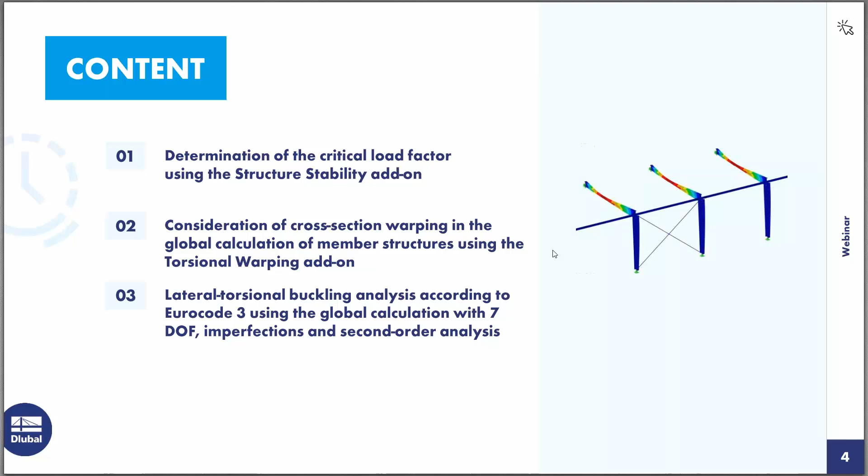The first thing we want to look at is the structure stability add-on. Here's a short overview of the features of this add-on. We can use the structure stability add-on to determine critical load factors for our structures and also calculate models consisting of member, shell, and solid elements.

In this webinar, I'm going to present members in the structure stability add-on because we also want to show the combination with the 7 degrees of freedom calculation. I think shell elements and solid elements will also be part of another webinar in the future.

Another feature of the structure stability add-on is the nonlinear stability analysis. We are using incremental loading to also calculate nonlinear systems in the structure stability add-on. There's also an option which will help us determine the mode shape of an unstable model so that we can find the cause of the instability. We will also look at this in the webinar today.

We can also have a graphical representation of the stability mode shape and use it as a basis for the determination of imperfections. In the first example, I want to use a simple example in RFEM to show you the basics of the input for the structure stability add-on and also which results we will get from the calculation with the structure stability add-on.

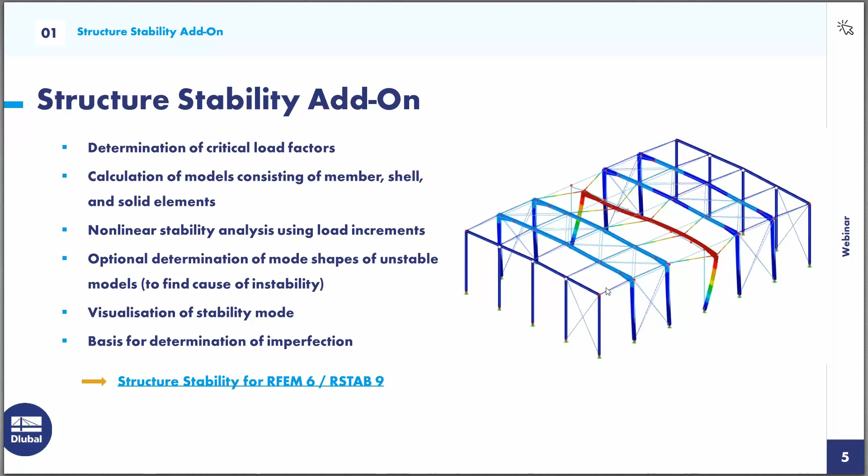So I will switch to RFEM and we will look at the first example. It's a very simple example in this case: a simple steel frame. We have rigid frame edges and simple supports. Now we have one loading condition: vertical loading and a horizontal load.

We want to look at all the settings necessary to perform a stability analysis with the structure stability add-on for this example. First, if you want to use the structure stability add-on, we need to activate it in the base data dialog. So I go into the Edit Model Base Data dialog, and then we have this tab for add-ons where we can activate the structure stability add-on.

You have probably noticed that in the main tab of the base data, we have chosen the model type 2D. So if we have chosen only this 2D model type, the structure stability analysis will also be performed in this 2D plane stress environment. We will see in the first step only mode shapes for this 2D structure.

Now I have activated this add-on, and we will see that in the navigator for the data we have an additional stability analysis setting. Without the stability add-on, we don't have this setting, but now it's here with already two predefined stability analysis settings.

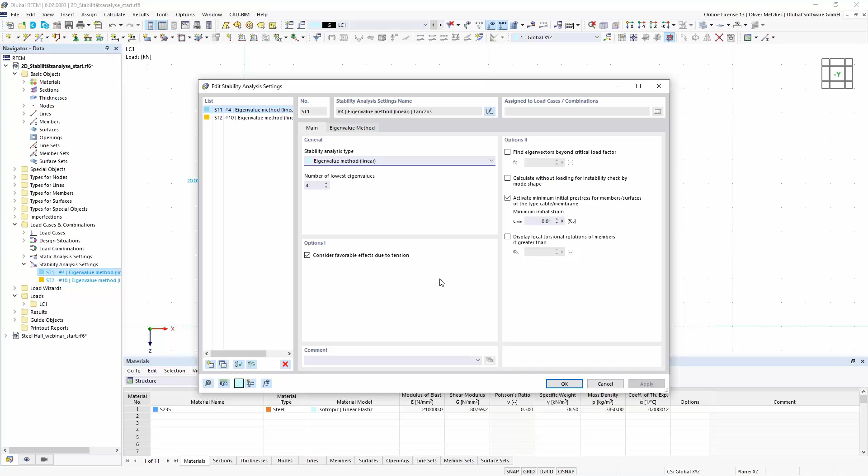If we open the first one by double-clicking on it, we see that in this stability analysis settings, we can set all the options that we want to consider for our stability analysis. So we have as an important choice the stability analysis type. We have this linear eigenvalue method for determination of the critical load factor, and also an incremental method for calculating nonlinear systems. In my example, I only want to use this standard eigenvalue method for the linear system.

When we have our stability analysis setting, we can also assign it to our load case to start the structure stability analysis. I can edit my load case number 1 by clicking the Edit Load Case button, and then we see that if we have this stability add-on activated, we have an additional option: Calculate Critical Load Structure Stability Add-on. If we activate it, we can choose in the drop-down list our corresponding stability analysis setting that will be applied.

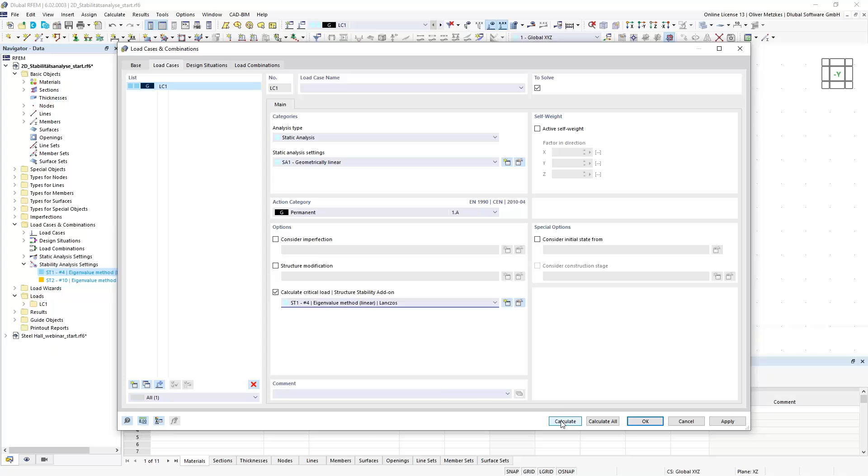If I calculate now my load case number 1, then we will see in the calculation diagram that first the static analysis is performed for load case number 1, and that is used as a basis for the stability analysis. When we have calculated our load case number 1, we will get the internal forces and support reactions for the static analysis, and we can also switch to the results of the stability analysis.

In the navigator for the results, we have this drop-down list where we can switch between static analysis and stability analysis now. If we switch to the stability analysis, we will see the graphical representation of the mode shape, and by default for the members it's represented by line display.

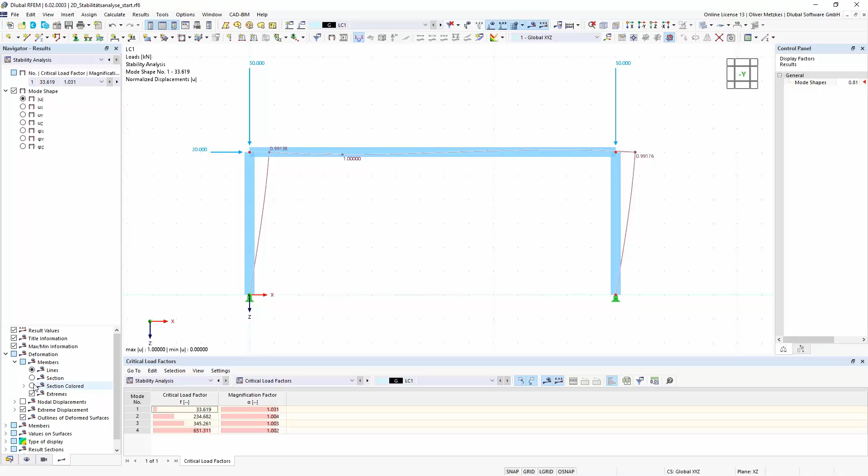We can also choose the display mode. Here in the navigator for the results we have options at the bottom, so if I choose to display my deformations for the members by colored sections, then I will also get this colored representation with the sections. That is mostly easier for the imagination of the mode shape.

I also get the results in the tables. So in the result tables for stability analysis, I will now see my critical load factor corresponding to the first mode shape. For this example, the first critical load factor is 33.6. That means that if I multiply the load of my load case number 1 with 33.6, I will have the stability failure with this mode shape of my simple frame.

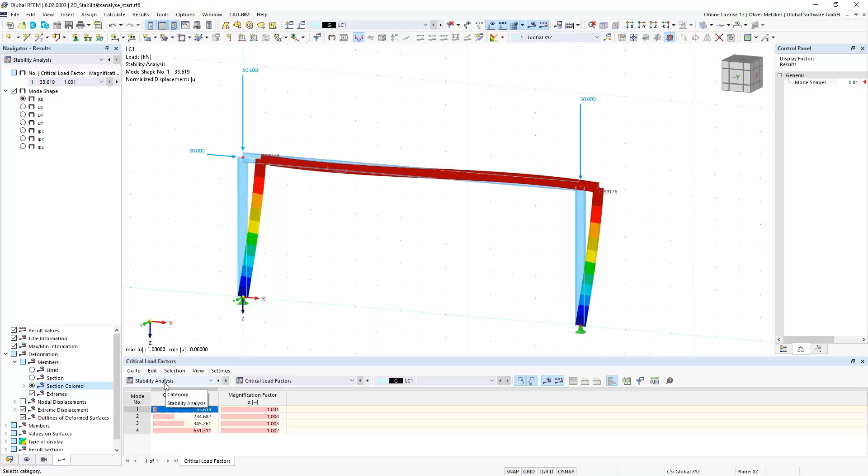So that is the result that I get, and I also get further mode shapes according to the setting that I have set in the stability analysis settings.

Now, I have said that this is only a 2D structure. So the first mode shape is this in-plane flexural buckling of the frame, and I don't get any out-of-plane buckling shapes. If I also want to consider the out-of-plane buckling, then I can go into my base data dialog and change the model type to 3D.

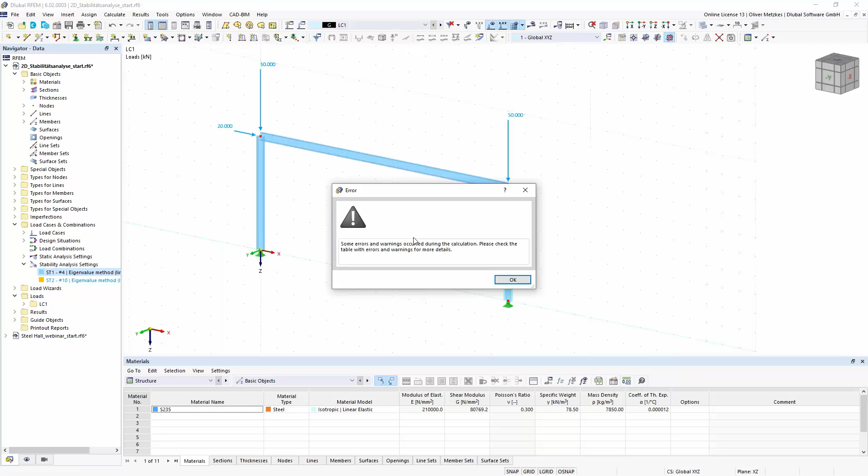I will do so. Okay. And then I can also just try to calculate it again. And then I will see that I have not changed anything with my support conditions, so the result of the calculation in this 3D model environment now will be that there's an error because the structure is unstable.

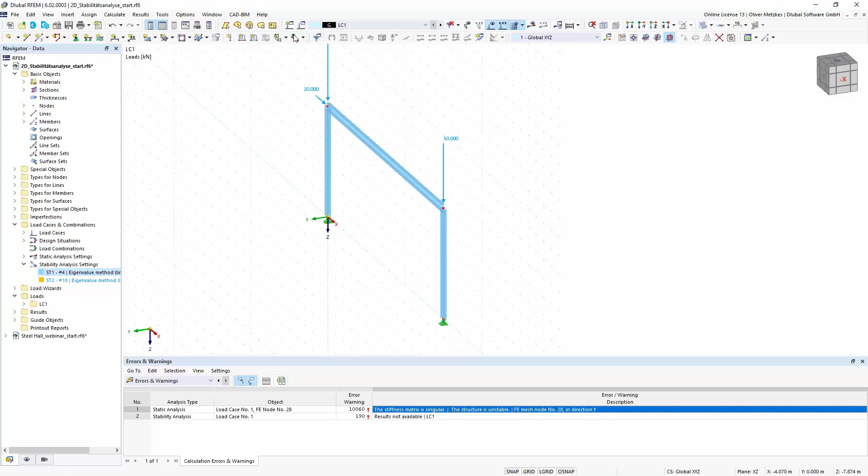For my easy structure, it is very easy to determine the cause because I have not changed my supports. I have the simple supports here, but I don't have any support in the out-of-plane direction. So for this case, it would be easy to say there are supports missing. But also if you have more complex models and get this error for instability, the structure stability add-on can be helpful.

So as I have said in the overview, there's another option. If we go into the stability analysis settings, we have this option for the calculation without loading, for instability check by mode shape. We can use this method if we think there may be an instability due to modeling issues, if maybe you have forgotten a support, or also if you have nonlinearities. This helps check if it's maybe a modeling problem that your structure is not stable, like it is in this case. As a result, you will get the mode shape of the unstable structure, and then you can easily see what the problem is.

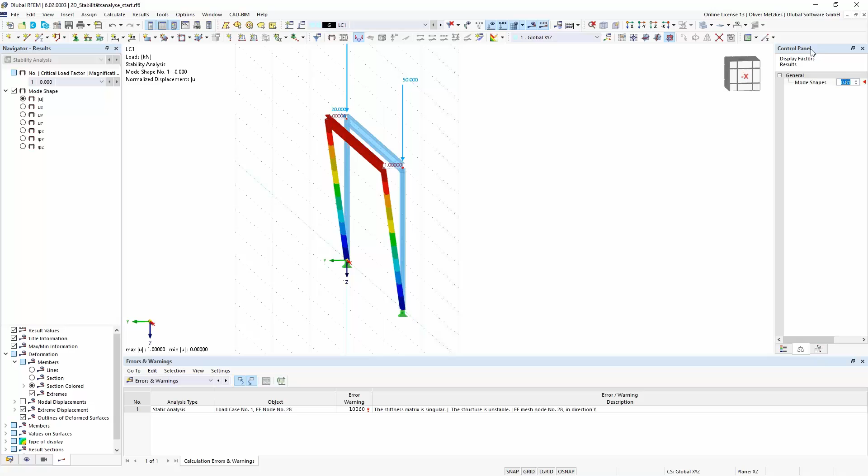So in my case, I don't have any support in the out-of-plane direction, so I will see that the frame will have a high deformation, and there won't be any restraint, and it will not be a stable structure that can be calculated.

This option is in the structure stability add-on that can help you in case of modeling issues with instability. In my case, it would be easy, so I just wanted to place some supports here. I'll have the supports in Y direction in the frame edges. So I select the Y direction here and assign it to my frame edges.

Okay, perfect. Now I can change the setting back so that I calculate my mode shapes with loading to get the corresponding buckling shapes. I will calculate it again, load case number 1, now also in the 3D model environment. So now I would expect to get also out of plane buckling shapes.

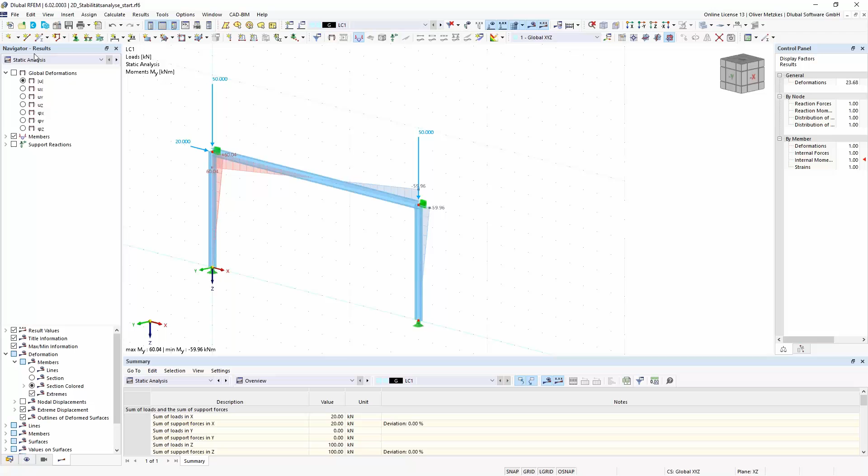I switch to stability analysis results, and now I see that the first mode shape is no longer this in-plane buckling, but now we get also out of plane buckling for the beam and also for the columns. For example, for this column, now I get this mode shape for out of plane flexural buckling with a critical load factor of 13.

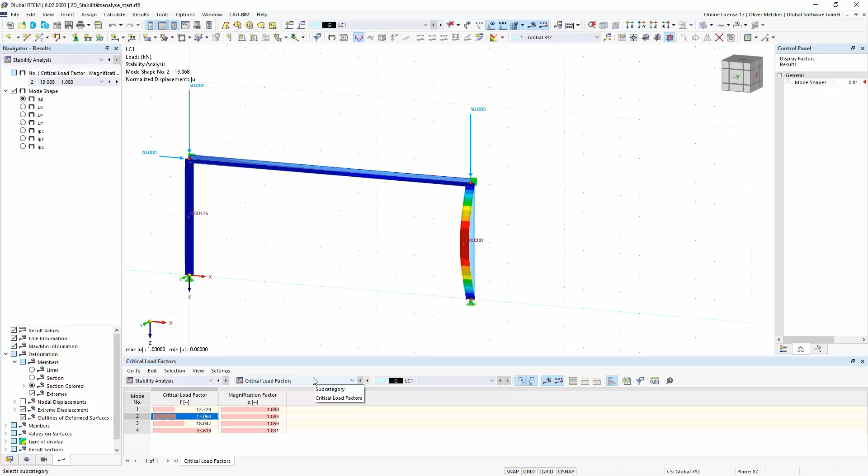So the result of stability analysis add-on is not only the critical load factor and the mode shape, but we also get the calculation of critical loads and also of buckling length. So if we go into the result table, results by members, we will also have additional tables like effective lengths and critical loads by member.

Using this load amplifier, the stability add-on already automatically calculates critical loads for each member and then determines effective lengths and, corresponding to the member length, also effective length factors.

So if, for example, we want to look at the effective length of this column, I click on it, it's member number 3, then we have to look also at results for mode shapes where this member is affected. So mode shape number 1 would be for the beam, but mode shape number 2 is the one for out of plane buckling of this column.

So as it is out of plane buckling, it would be buckling around the weak axis. We can also display the axis system, so buckling around the z-axis, and the corresponding principal axis now would be the v-axis. So we have to look at member number 3, mode shape number 2, and L critical V.

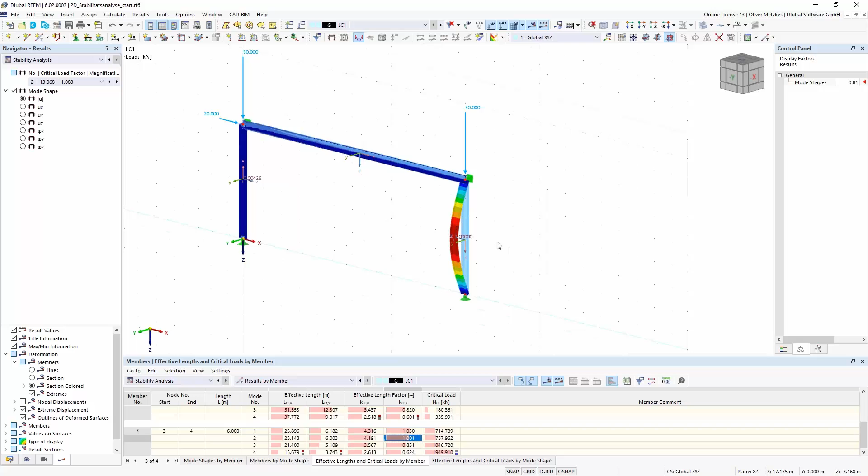So it's an effective length of 6 meters, and the corresponding effective length factor would be 1.0. That is as expected, as you would say the critical length for this column with hinged support conditions at start and end would be the member length.

So this would be the effective length for the buckling around the weak axis, and buckling mode shape number 4, that is still this in-plane flexural buckling, would be for buckling around the strong axis. So member number 3, mode shape number 4, and now it's L critical for the U axis, around 16 meters, with an effective length factor of 2.6.

So those values could now be used if we want to perform, for example, stability design checks according to the equivalent member method. We could also use these effective length factors for the further design. So we get from the stability analysis result mode shapes, critical load factors, and also effective lengths for the members. I think that is good.

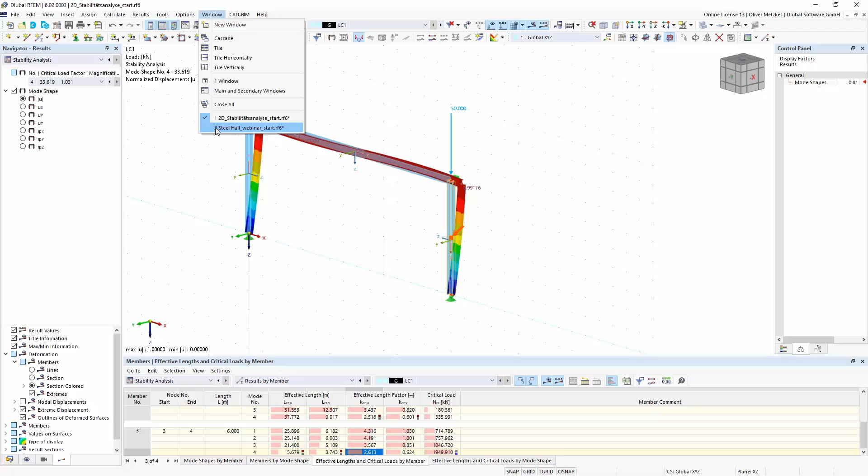We have seen all this input on this simple example. And now I want to also give you some hints about the behavior of the stability analysis add-on in a 3D model. So now I switch to my next model for this webinar.

It's a steel hall with simple frames, so rigid frame edges, also simple supports, and some loading. I have simplified it a bit, so I only have self-weight and snow load, and then wind loads only one per direction, so I have not considered also the negative ones, for example. It's a bit simplified, but I think for our example today, it's a good example.

Now you can also calculate critical mode shapes with the stability add-on for this 3D structure with consideration of all the structural elements. So the whole structure is considered, and you don't need, for example, to consider any spring stiffnesses for members that are not considered, like the bracings. It's already considered in this 3D model with its corresponding stiffness.

So we can have a look at it. First, for sure, we would need to activate the add-on in the base data dialog, so add-ons and structure stability.

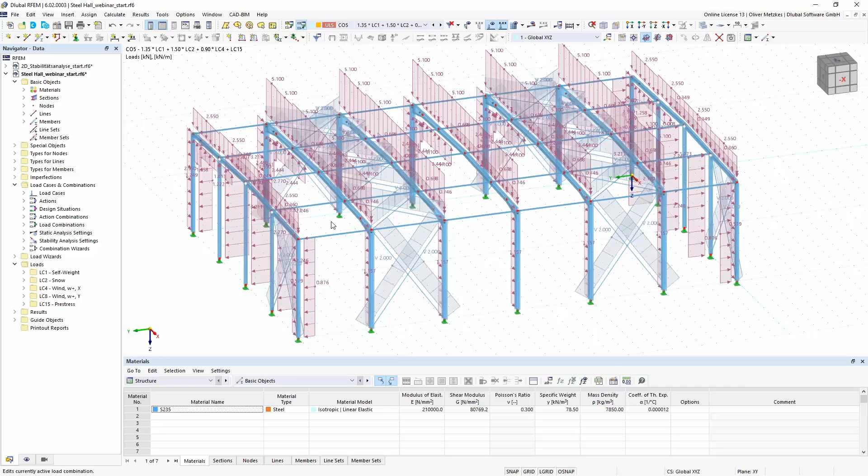Now we also have the stability analysis settings in here, and we can assign it to our load case. So if we want to determine the critical mode shape, we can select a load combination where we think we have the most governing load, like combination number 5. I can also activate this calculate critical load for the Structure Stability add-on and calculate it.

So we can also assign this setting to load combinations and not only to load cases. So first static analysis of the load combination, then stability analysis using the internal forces that have already been calculated. Now we see the mode shape number 1 for the critical load factor of 18 in load combination number 5 is displayed here.

So that's only one load combination. For a structure with lots of load combinations, it would be interesting to find out the one that would be the governing one for the stability analysis. So the wish would be to analyze the stability of all the load combinations and not only one. That is also possible.

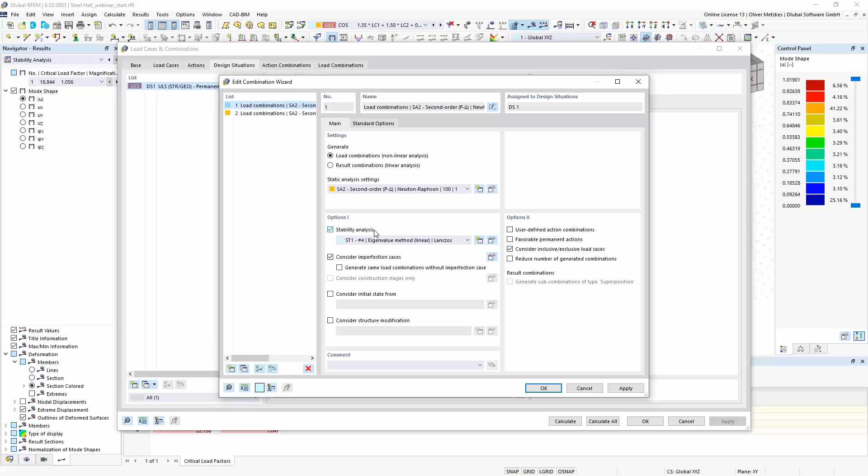We can go into the combination of the loadings, so design situations. As you probably already know, all the rules for the combinations are set into this combination wizard, and we can also modify it. There's an option for stability analysis. With the activation of this option, we can also activate the stability analysis for all our load combinations that are created by this combination wizard.

So I will activate stability analysis, and I want to recreate my combinations. I set it here again. They are recreated, and we see now every load combination will have this calculate critical load option activated.

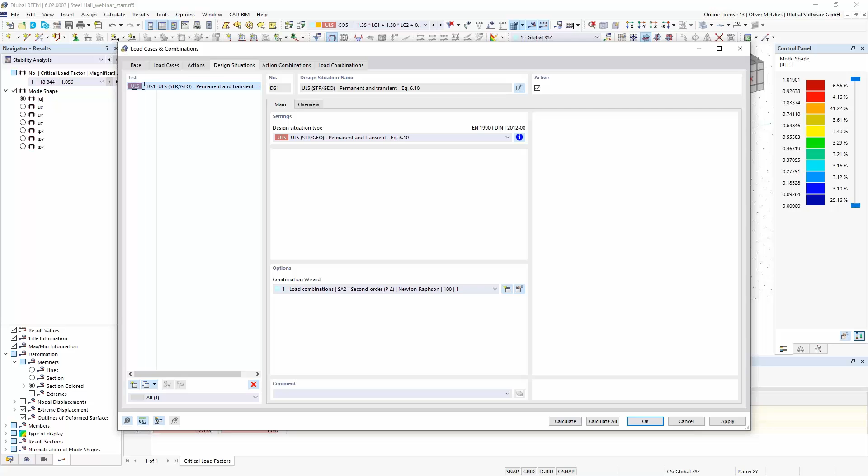If I now calculate my design situation number 1, I will get all the results of all the load combinations, so all the combinations will also be calculated by stability analysis. In the results, I don't have to look at each combination one by one, but I also get the results of the most critical load factor.

So we will also look at this result in the result tables. If I am in my design situation, in the summary of the static analysis, I will also have this additional line of minimum critical load factor. Now we see the most governing one is my load combination number 6 with a critical load factor of 11.1. We can then have a look at combination number 6 and the results for the stability analysis.

And we will see that it's also this mode shape for in-plane flexural buckling. So that is the most critical stability issue for my load combinations present in my design situation number 1.

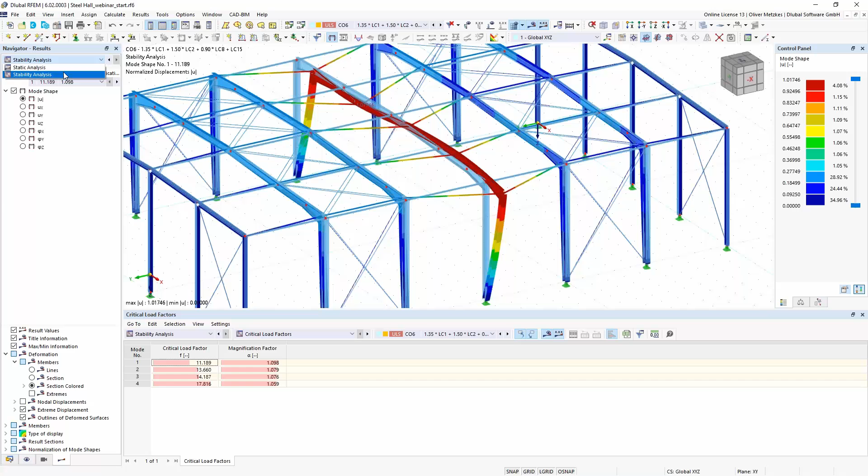If we look at this mode shape, we see it's in-plane flexural buckling. But when we look at the internal forces, we know from our loading — snow load, wind load — we also get a bending moment My. So we would also expect a lateral torsional buckling problem of our main beam. But we haven't seen this mode shape from the stability analysis.

The reason is that in our standard RFEM and RStab calculation, we only have this 6 degrees of freedom solver implemented. So for the stability analysis, we can cover flexural buckling, but we don't get the mode shapes for lateral torsional buckling if we don't have the additional add-on activated for the 7 degrees of freedom.

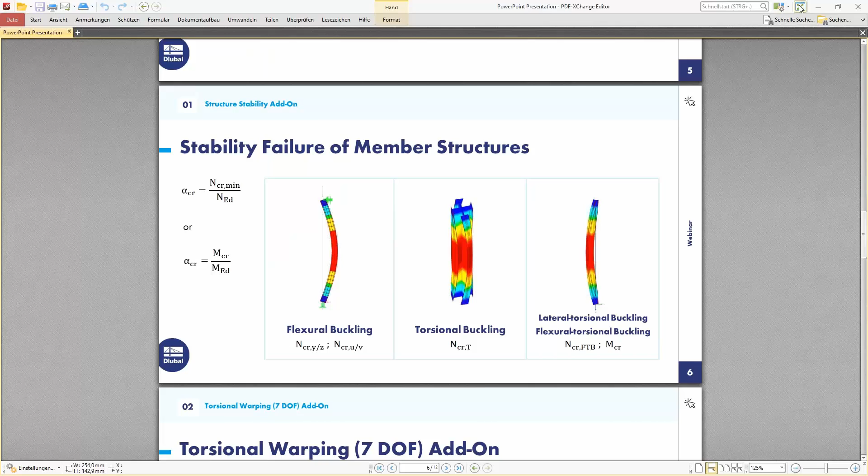For a short overview about the possibilities, I want to show another page in the PowerPoint. We want to have a look at the stability failures of the members.

As we already know, we have this problem or stability issue of flexural buckling. So we have a compression force in the member, and as a stability mode shape, we will get this lateral deformation. There we have the critical loads, critical for buckling around the principal axis or around the geometrically axis, so strong and weak axis — the flexural buckling mode shape.

But there are also other stability issues. We also have the torsional buckling mode, mainly an issue for such cruciform members, for example. As a stability mode, we will get just the deformation around the longitudinal axis, so no lateral deformation.

And then we also have another mode shape, a combination of both shown before — flexural torsional buckling. So if I have a compression force and it's an unsymmetric cross-section, for example, then I will have this torsional deformation and also lateral deformation.

So then we will get the critical compression force for it. But also for members in bending, we have this problem of lateral torsional buckling. So the compressed flange will get lateral deformation, and for the whole cross-section, we have this torsional and lateral deformation. So this is the lateral torsional buckling.

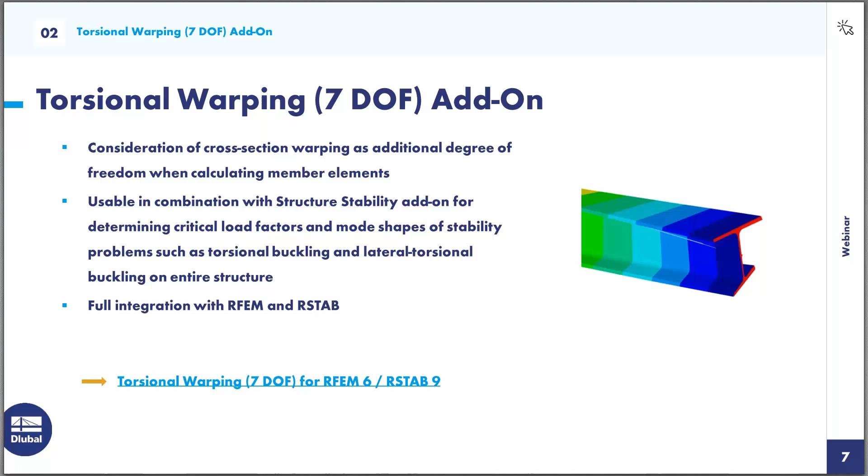Possible applications and use cases of this add-on are listed on this page. We can use it for all thin-walled cross-sections with intended high torsional moments, for example craneway girders, where we want to consider the torsional load so that we have primary torsion and secondary torsion.

It's also used for the calculation of lateral torsional buckling according to the standards for non-doubly symmetric cross-sections. For example, for channel sections, we can't use the equivalent member method according to Eurocode 3. So we would need to consider the lateral torsional buckling problem using second order analysis with 7 degrees of freedom, also with consideration of imperfections. We will look at this lateral torsional buckling check later.

We can also use this add-on to consider it in the stability analysis of the global model, so that the stiffness of all the connected structural elements is considered correctly.

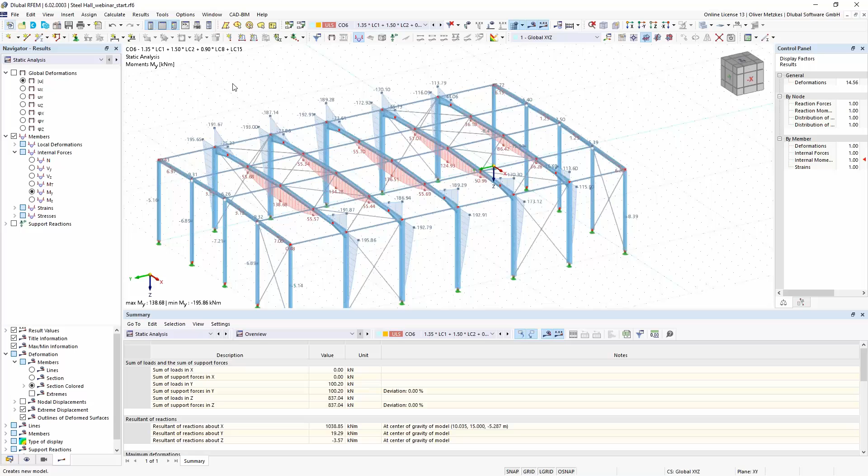Now I want to begin with a very simple example. The example I want to show is a craneway girder, which I want to model in RFEM 6, and I want to show all the necessary input for the application of this Torsional Warping add-on. So I just want to create a new file for this craneway girder, and I want to activate the add-on Torsional Warping.

Maybe I will go back to the main tab, because you see I use now the model type 3D. If I want to use a 2D model type, then I can't activate this Torsional Warping add-on, because if you want to consider the 7th degree of freedom, it's already a 3-dimensional calculation method of the members. So we would need at least the 2D/3D model type, or the 3D model type. If you only have 2D, then Torsional Warping is not available. So now we use 3D model type, and then we can activate the Torsional Warping.

As I want to calculate a craneway girder now, I also changed the load case classification for the crane race. In this example, I don't want to deal with all the necessary design checks for craneway girders, since we don't have them implemented yet in RFEM 6 - no fatigue design checks, for example, and we also don't have this moving load situation. That will be implemented later. But now I only want to show this example so we can look at all the details for the calculation with the Torsional Warping add-on, because we will get torsional moments inside our craneway girder.

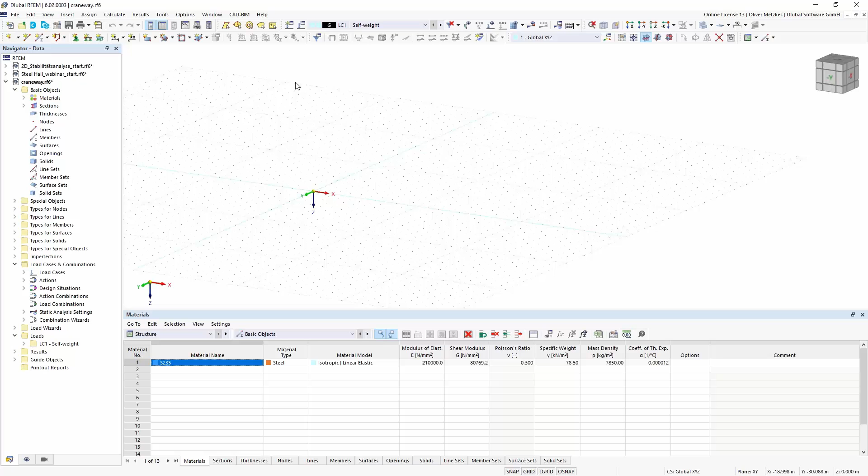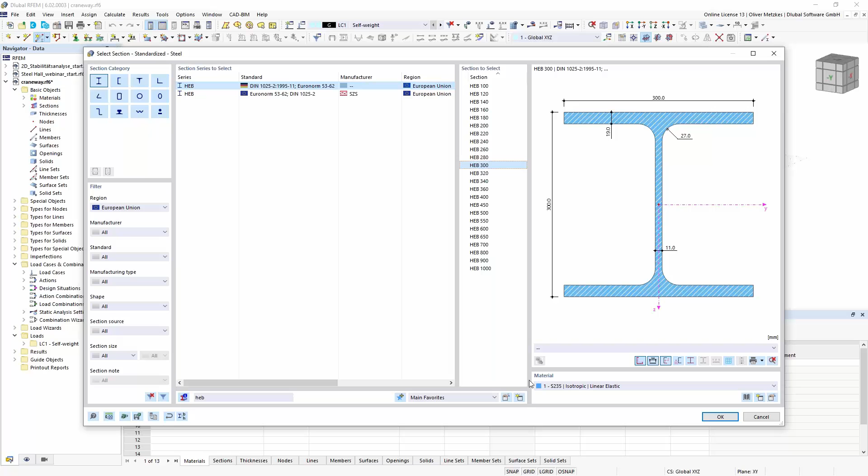Okay, it would be a very easy example for the beginning, so we will start with an I-shaped section. I want to have an HEB 300, so I just select it from the library, using this search function at the bottom to find it in my list, then HEB 300. For the material it should be S235, which is already the default material for me. So I confirm the setting and create my member.

I want to have it with 12 meters of length, so I can just pick the points of this line grid here. Okay, so that is my member, and now I want to place supports - I want to have a torsional restraint at the beginning.

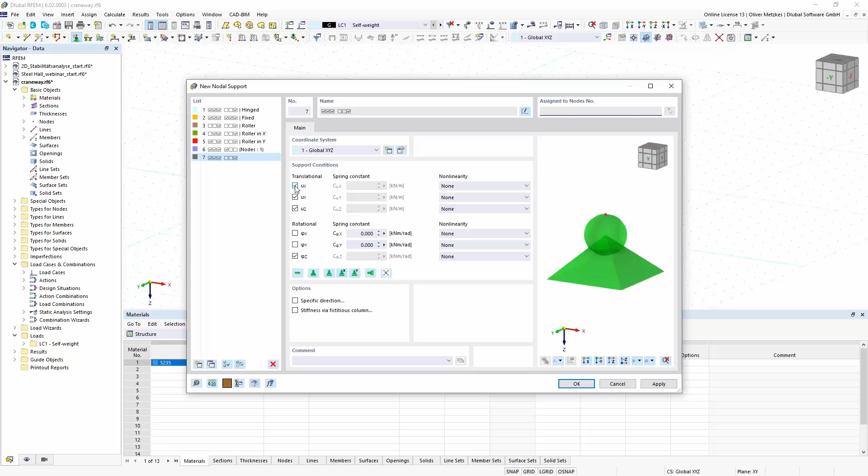Okay, so all the deformations and also the rotational restraint around the x-axis, and also another support at the end. So it will be the same, but now I don't have this longitudinal deformation fixed. I also want to consider an additional support in the middle, so it should be a two-span beam.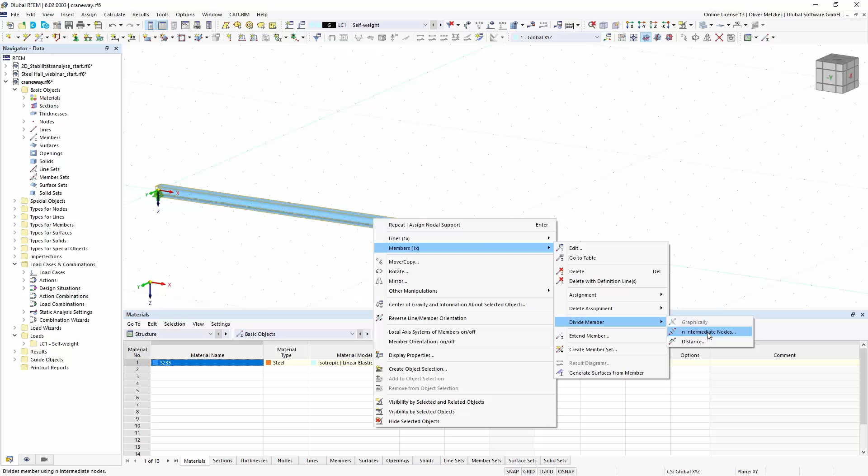Now I use this function of dividing the member. I right-click the member, then in the members I choose this divide member by intermediate nodes. I can select one intermediate node, and now I want to use this option, create on member nodes without dividing the member. That is important for the warping torsion analysis, because only if the member is considered as one member without division, then also the torsional warping will be continuous in this member. So if I would divide the member, then those two members would be independent.

We will later also look at this problem, and there are also solutions for that. But for now, I want to use this option to create only the nodes on member. So now I have this node on member, and I also want to have another support here. So I just copy this one also to the middle.

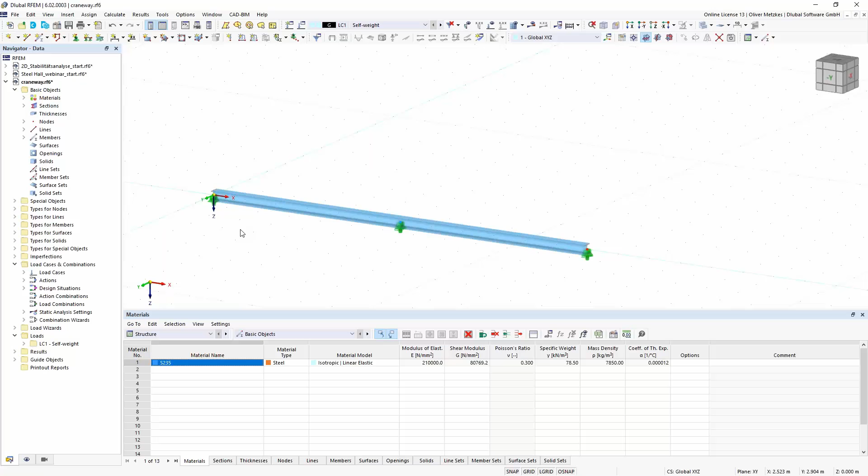Okay, so that is my beam and also the support conditions. And probably you have noticed that in the support conditions, even if you have activated 7 degrees of freedom, we only have this 6 degrees of freedom for the support conditions. So in our calculation, we only have this torsional warping degree of freedom for the members.

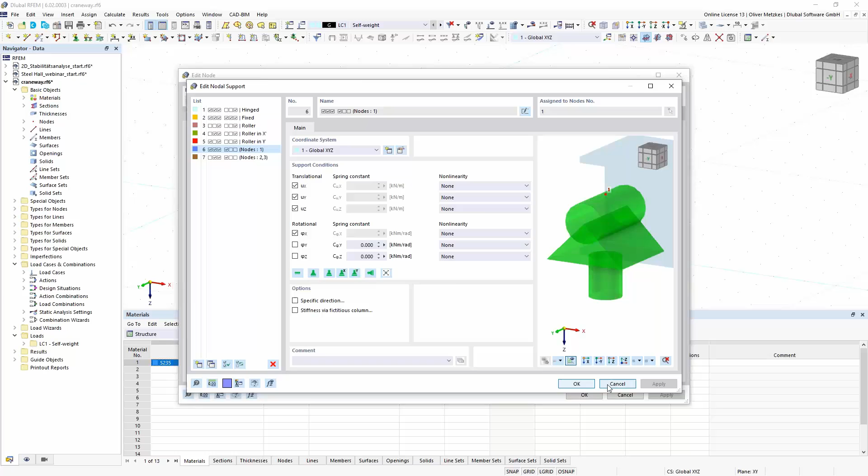So it is seen just as a member problem, and also as a member property, we would need to define warping restraints, for example. The nodal supports could also be used on surfaces, for example. So we have decided not to offer the warping restraint as a nodal support, but as a member property, because it's also only valid for the members.

And for this, we can edit the member, and then we have this transverse stiffeners. This additional type is used to place transverse stiffeners for the design and also supports for the warping torsion analysis. So as it's like always in RFEM 6, we have this additional tab, and now we can create types

of transverse stiffeners, which could then be assigned to the different members. So now we have this new type of transverse stiffener, and we can see as a stiffener type, we can select between different options. So we can place, for example, end plates at start at end, or also flat stiffeners, and also the warping restraint.

So in my example, I just want to place a full warping restraint at the beginning and at the end, and that is possible using this warping restraint option. There's the user-defined restraint also available, but I want to use the full warping restraint here. I set one at the position of 0 and then a second one at the end. So I use the relative input by clicking on this button, and at 100% of the beam length I will have the second full warping restraint.

I also want to add a flat stiffener in the middle where I have my other support. So at 50% I have my flat stiffener with a certain material and thickness, so 20 millimeter, and also the width of 120 millimeters. You see that automatically the program calculates the resulting warp spring that will be used in the analysis. So from the input of the thickness and the width, we will get automatically with the cross-section properties the warping spring that will also be considered in the analysis.

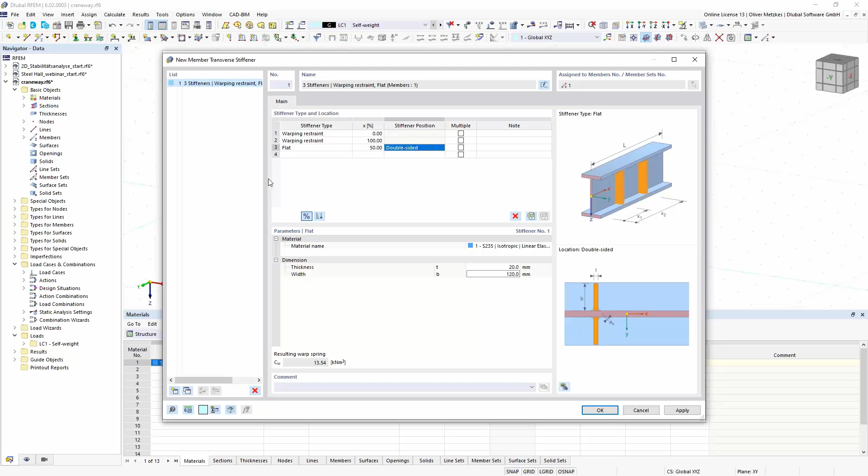So you can use this type of member transverse stiffeners to set all the warping restraint conditions for your member. Okay, we also see a certain graphical representation. So this is the full warping restraint, and here we have our stiffener placed in the middle.

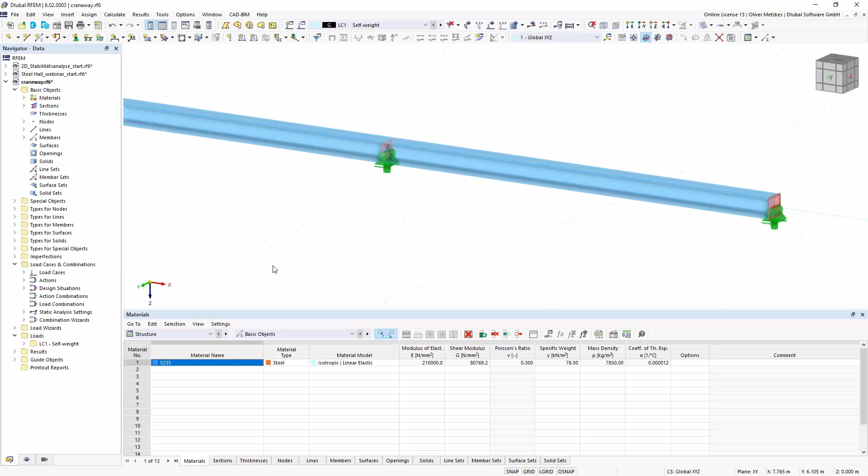Okay, so now we have our system, and we would need some loading. And in the load cases, we already have created this load case number 1 for the self-weight. And the self-weight is applied automatically by using this self-weight factor in the Z direction.

By default, if we have switched to warping torsion analysis, all the loads are applied also in the center of gravity. So also the connection between all the adjoining members and the supports, they are assumed in the center of gravity. And also the loads by default are applied in center of gravity of the cross-section. So that is a difference compared to the standard 6 degrees of freedom calculation in RFEM. So there we always apply the loads in the shear center.

But now for warping torsion calculation, this additional torsional moment is important. So now it's really applied in the center of gravity. So we have already our self-weight loading.

And now I want to also create some crane loading on my beam. As I have said, we don't have this moving load implemented for now, so I could create it by hand, and I will just first show it as an example. For this craneway loading, I will use the member load for now, and I use the concentrated load distribution type, not the uniform one, but the concentrated.

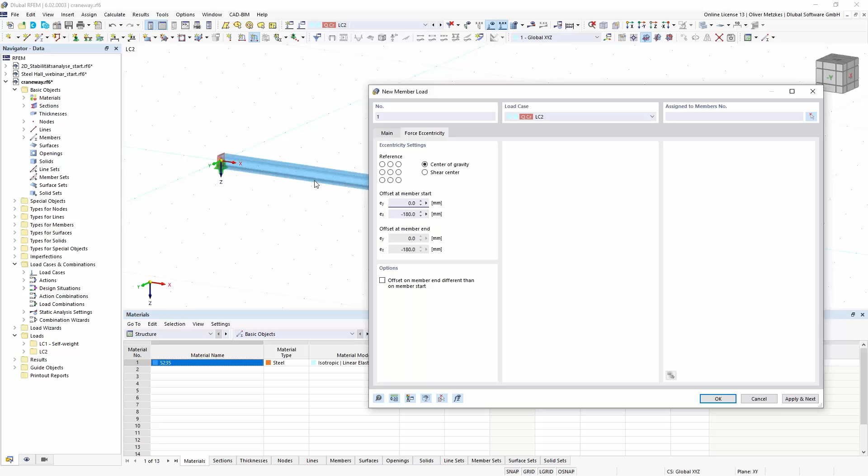But as I have an additional eccentricity, I just type it in here for this just as a value, negative because the local z-axis is going downwards. Okay, I can just apply this load at the member number 1.

And I could also apply another one, for example, a horizontal load. So just one load with 20 kilonewton at the same load distance, now in the y direction, still with the same eccentricity. Okay, so I apply it to my member. So I can create the load manually like this.

So now I would need to copy the load cases because I want to have it moving, and then also change the distances for the first loading point and the second loading point. So that would be possible, but yeah, it's quite a bit of work. So I want to use another possibility here.

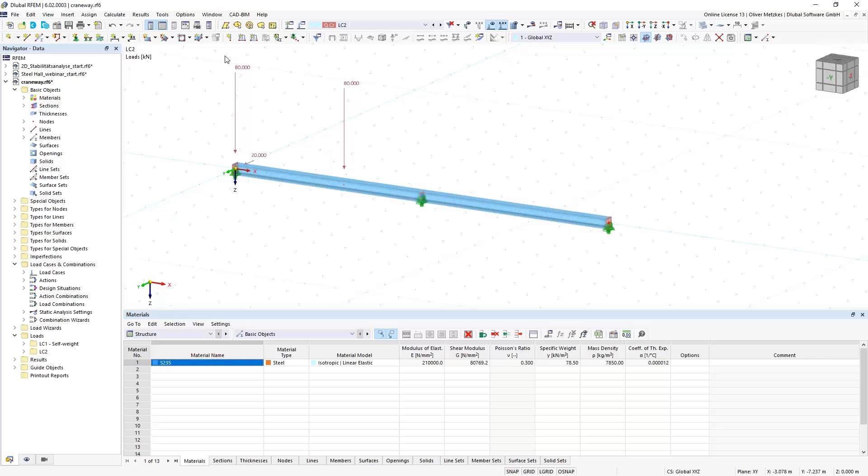You have probably seen in the previous webinars that now in RFEM 6 it's always possible to use JavaScript code for the creation of the model. So if you activate the script manager, we have it here in the list, you will also get example scripts for this creation. For example, in the examples we have a simple beam one. If I just open it with the text editor, we will see there are also examples for creation of materials, how to create a node or a member.

And for our case now, the important thing is the creation of a concentrated member load. You see we can create this member load by JavaScript code, also set this load distribution as concentrated, the direction for example, and a certain load magnitude. So basically all the options we have in RFEM, they are also available in the scripts.

You can see all the options if you also open the console. We have it here with a small info button, and if we click on it we will see all the objects and all its properties. So in our case, for example, it's a load case, and we have also member loads inside, and then you see we have all these options available, so all the distances, also eccentricities, and you see how you can apply it in the code. So that is always good if you need to find a certain property and how to set it.

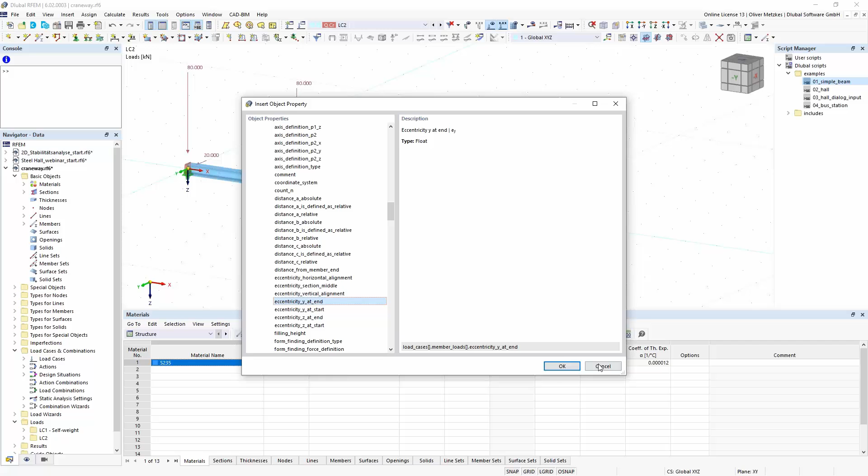And then it's relatively easy to create this JavaScript. So from this simple beam I have created another one for my simplified craneway loading here. So I have certain input data with a distance between it, and then I set my concentrated load for the horizontal load with my eccentricity of 180 millimeters, and then also this concentrated load in vertical direction, as I have done manually, but now it can be done by JavaScript.

So then I have this for loop that it creates automatically the load cases and the loads in each load case. I think that is a very easy method, and it's not too complicated with this simple code snippet. And to apply it, you can just copy it here into this console.

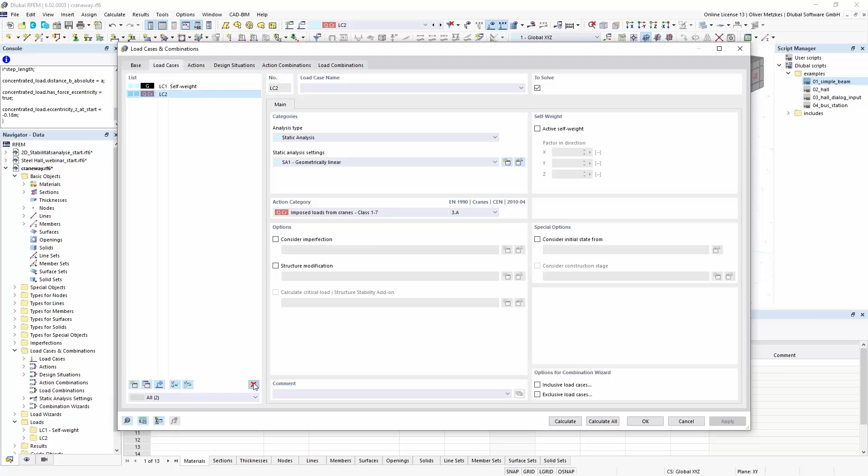So just copy it and paste it, and before applying it I want to delete this load case number 2 again, because it will be created by the script. With the return key I can start the script, and now in my load case list I have created those additional load cases with my member loads. If I click through them, you see it's this moving load which I have simplified, applied by this JavaScript code. That's also an easy solution.

If you have things that you want to automate which are not implemented by default in RFEM, you can also use JavaScript.

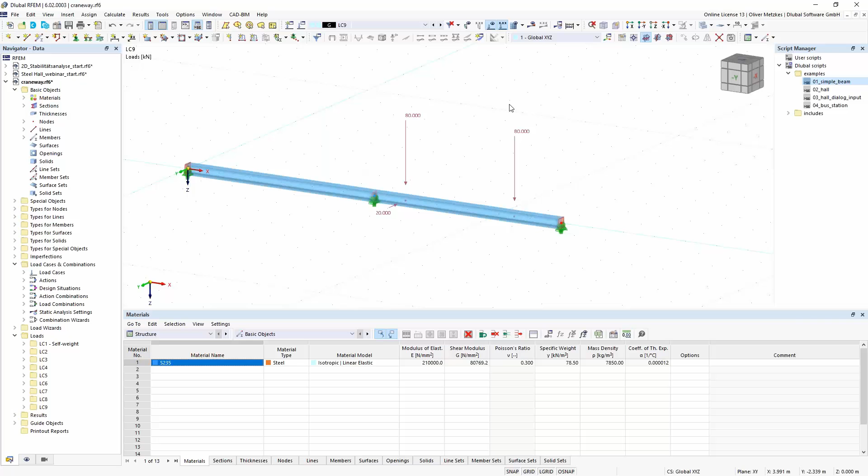To create the objects. Now I have my load cases and I want to change the action category for them, since they're from the cranes and are alternative loadings. So I will change this action type to alternatively.

Then we have our design situations and the combination rules. I think you already know that from previous webinars, like the steel design one. In this example, I don't want to show it in detail, and I also don't want to look at the design situations for the deformations, but just for the ultimate limit state.

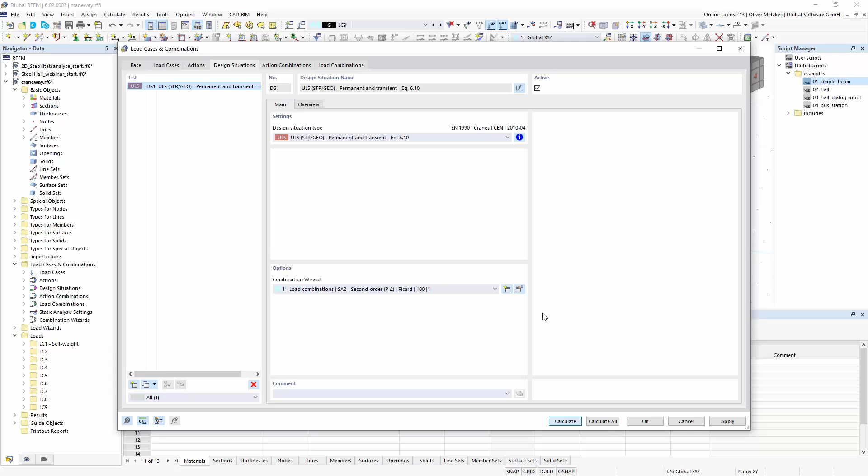Now I have created my load combinations, so for each load step I will have this combination. If I calculate this design situation, I will get the results for my load combinations with the warping torsion analysis activated. We will have a look at the results, and now we also expect to get the torsional moments correctly—primary torsion, secondary torsion—we will get it here in the result navigator.

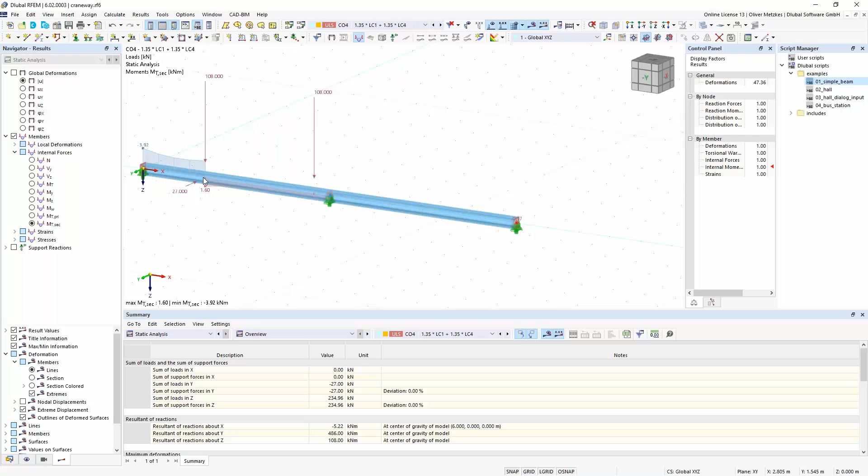In the internal forces you will see we have these additional choices, so the bimoment for example, and also primary torsion, secondary torsion. If we look now at a certain load combination like this one, we have here our eccentric load, and so we have this change in the secondary torsion because this load is applied.

Also the warping deformation, we will get it as a result in the local deformations. Now we have calculated our load cases, and that could be used for the steel design, for the cross-section design, without the stability analysis.

If we now also want to perform our stability analysis, so in this case a lateral torsional buckling check, we want to consider the torsion correctly, so we would need this add-on with 7 degrees of freedom, a calculation according to second order theory, and also the imperfections. That would be our lateral torsional buckling check.

So in this case, I want to create the imperfections from the stability add-on. I want to use the mode shape and scale it to a certain value so that I can easily create my imperfection. So we'll close this script manager again.

Now activate also the stability analysis add-on, so in the add-ons, structure stability. Now I could also analyze all my load combinations, for example, look at all the mode shapes and scale them to a certain imperfection value.

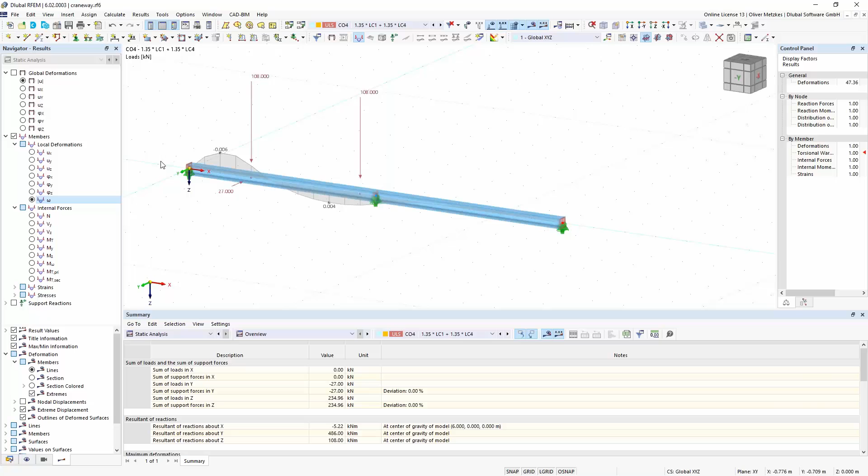But in my example, it would be easier to create this imperfection out of a mode shape of my self-weight load case, because then I would have this symmetric mode shape which I would need for my imperfection value. So in this example, I just want to apply it for this self-weight.

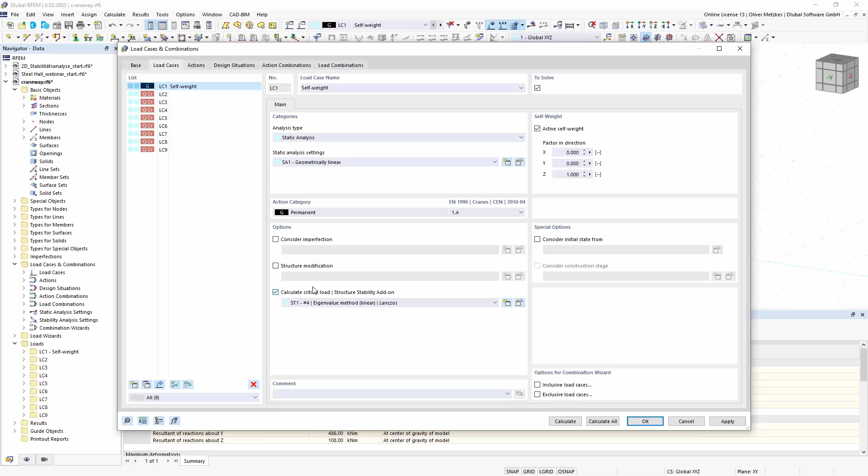So I activate this option, calculate critical load, and then calculate my load case number 1. As we have now activated the torsional warping add-on, we now also expect a lateral torsional buckling shape, not only flexural buckling. We will see it if I activate the deformation by colored sections. Now we see with the 7 degrees of freedom add-on, we get this lateral torsional buckling shape.

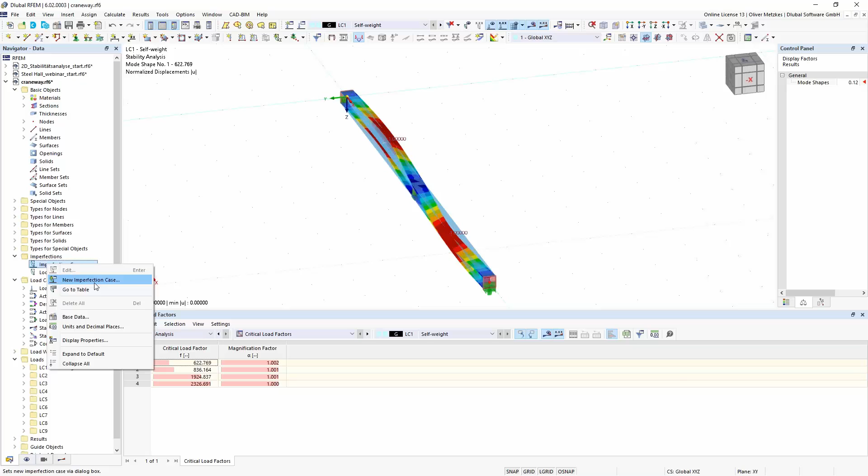Now I want to use this one to apply it as an imperfection. For that, I can go into my navigator data and create a new imperfection case. In this imperfection, I right-click the imperfection case to create a new one. If we have the stability analysis add-on activated, we also have the imperfection type of the buckling mode that we can use.

If I create imperfections from a buckling mode, I first have to select the load case—in my example it's load case number 1 and also buckling mode number 1. Now I need to set the imperfection magnitude. For our lateral torsional buckling design check, the standards are giving imperfection values. So in the Eurocode 3, you will also get imperfection values for flexural buckling and also for lateral torsional buckling. And now you could also apply this imperfection.

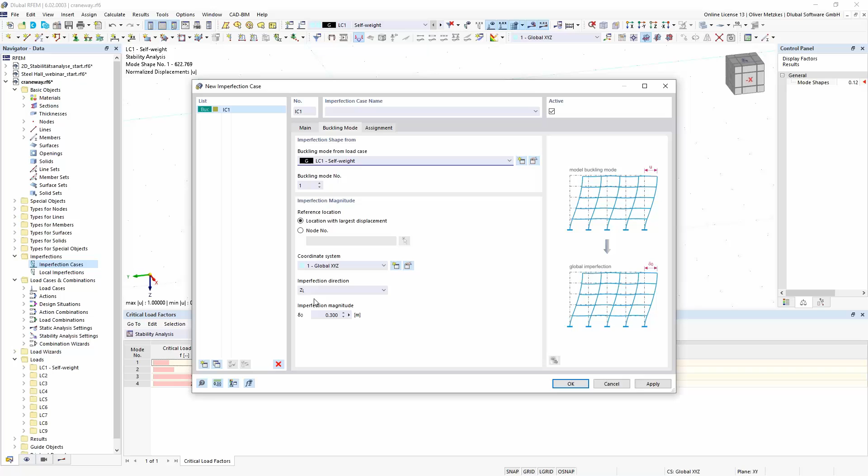So in my example, as an imperfection value, I can use 1 per 200 of the reference length, which would be between the fork supports in this example. So this length and 1 per 200 of this length will be the imperfection value that I would need to use here. It also depends on the national annex for the Eurocode.

So it's always important to look at the national annex of your country so that you can set the correct imperfection magnitude. So if I want to set it here, I choose the imperfection direction in the Y direction, and then I could manually calculate the imperfection magnitude, or again, I could use the formula input, and also in these formulas, the JavaScript code is allowed.

So now I can also get the properties of all the RFEM objects. So for example, from my members, it's member number 1. I can also get the length information here. So it was 12 meters. And now I want half of it because the support is in the middle, and 1 per 200. And so this imperfection magnitude would be the value that I should use.

Okay, and if I now change the member length, for example, also this value would change because it's defined by the formula.

Okay, in my example, I would also need to check the imperfection in the positive or in the negative direction. So depending on the load case which I analyze. And as I want to analyze all my load combinations, I want to also set this imperfection in the negative direction.

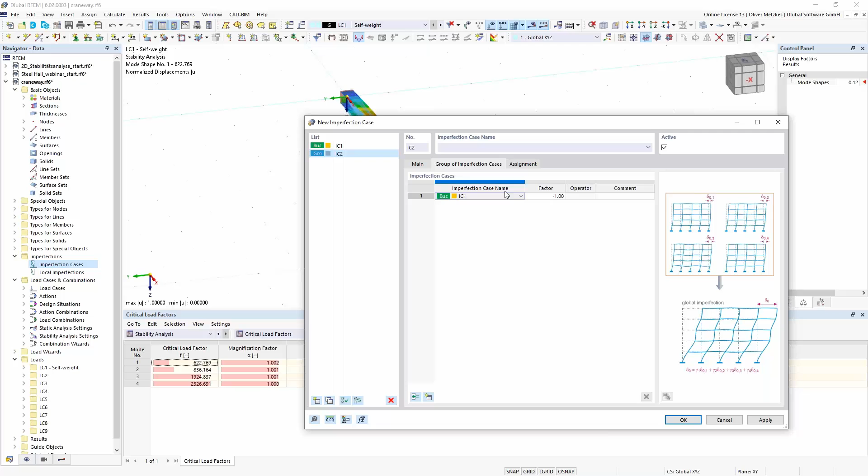But in this case, I just want to use it for applying my imperfection case number 1, but with factor -1 so that it's just in a negative direction.

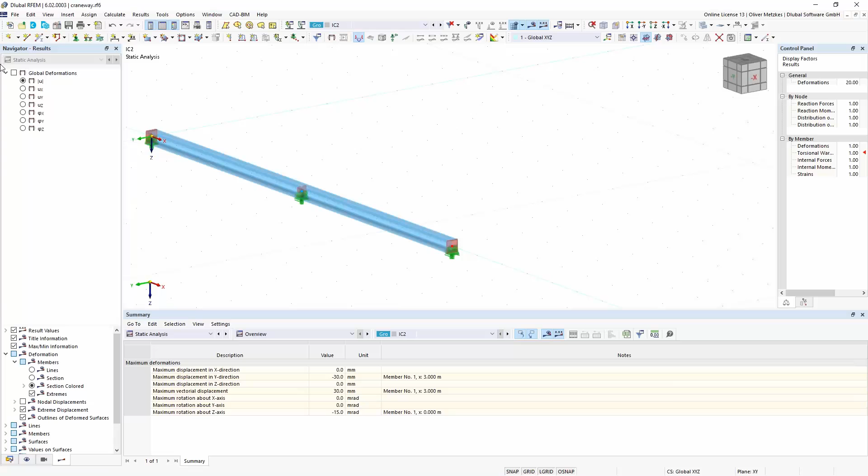Okay. I can also display the shapes of the imperfection cases. So if I just calculate this imperfection case number 2, then it takes the mode shape of load case number 1, scales it to the value, and as we have the negative factor, we will have it in a negative direction. And then we can look at the results for the global deformations.

So this is my imperfection shape now in imperfection case number 1 and in imperfection case number 2. And now I can also calculate it for number 1. And you see it's just the opposite direction with the imperfection magnitude that I have set in the imperfection case. So imperfection case 1 and 2.

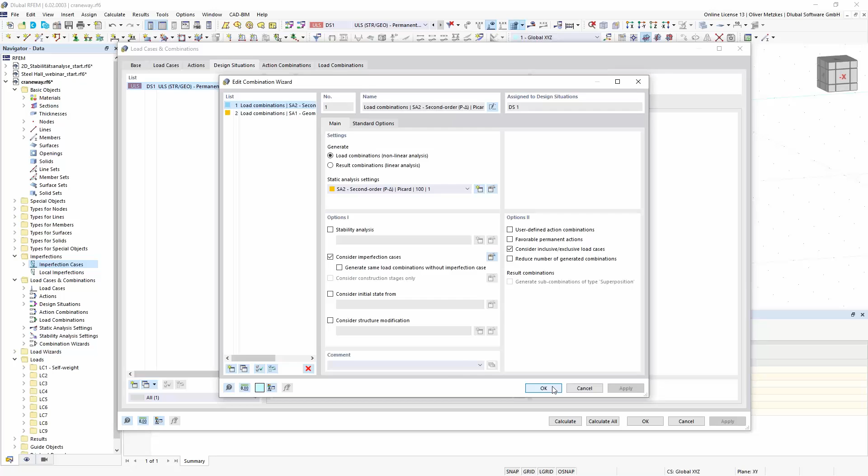I can now use the imperfection in the combination. So in my design situation number 1, if I look at the combination rules, so in the combination wizard, I can here activate my imperfection cases, and then they are also considered in the combination. So if you look at the load combinations, we see now we have the same loading one time with imperfection case number 1 and then imperfection case number 2 and all the load cases.

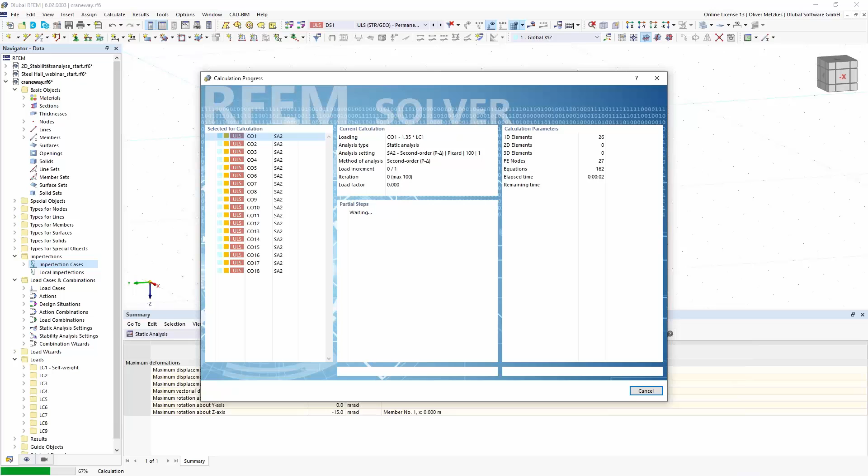So and now if I calculate this design situation number 1, then I will get the internal forces calculated by second order theory with the imperfections and also the warping add-on activated. So I could use this internal forces in a cross-section design check, and that will replace my stability design check for lateral torsional buckling. So that is possible according to Eurocode 3, and then I could use those internal forces.

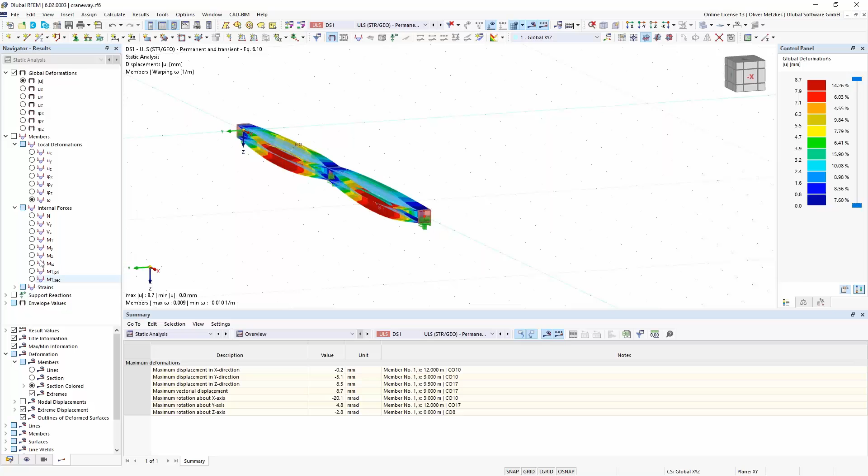So all the internal forces I get now in this design situation number 1 can then be used also, for example, in stress-strain analysis add-on or also in a steel design add-on. So I want to show that before.

So if I just activate my steel design add-on in the base data dialog, so maybe it's also a good idea to just save the structure. So okay, I just saved it. And then I activate my steel design add-on, and I can look also in the input tables. I think you already know this input from the steel design webinar.

So we have our design situation where all our internal forces are considered. Then objects to design, materials and sections, that is automatically overtaken from the RFEM definition. And the important thing now for our cross-section design check, if you want to use it as stability design, we need to look at the ultimate configuration.

So if we go inside here, we can activate this option to perform the stability analysis with the second order internal forces. For that we need this partial safety factor for stability design. Normally cross-section design checks use the partial safety factor gamma M0, but for stability design checks, we need the gamma M1 partial safety factor. Depending on the national annex, this factor can be different, so we need to activate this option.

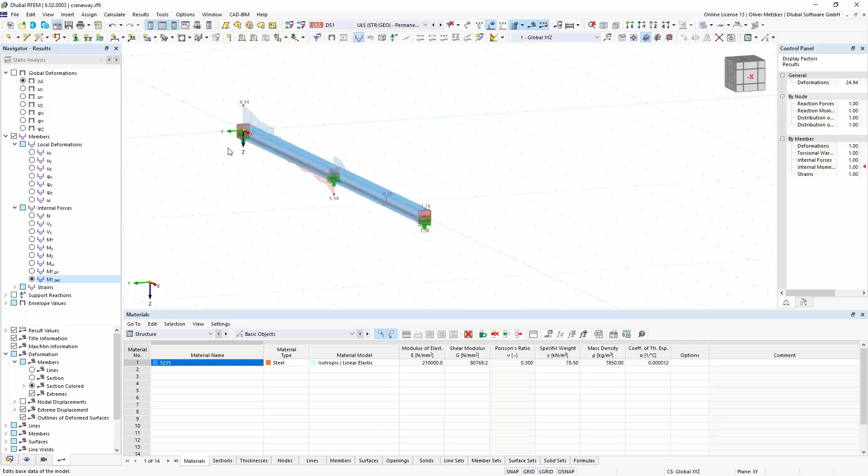We also don't need any other stability design checks, so no need to perform the equivalent member method again, because we already have all the effects in the internal forces. Now this setting is applied to our member. I see the add-on is deactivated again, so I will activate it for steel design, but I think all the settings have been made. Yes, this is the correct setting with this gamma M1 factor, and now I can calculate my steel design.

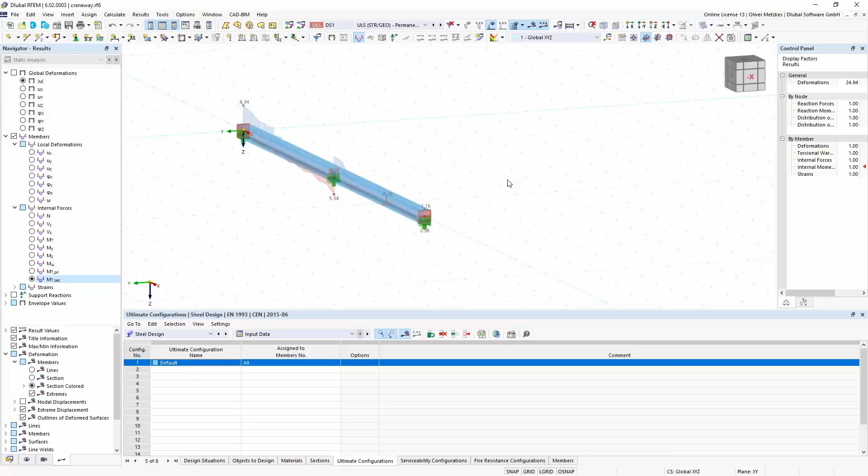I will see all the steel design checks with consideration of all the internal forces, including bimoment, secondary and primary torsion. If we look briefly at one of the design checks, for example the most governing one, we see in the results we are calculating the equivalent stress, considering the stress from bending moment about strong axis, weak axis, and also the axial stress from the warping bimoment. So all the necessary internal forces are included, and we use this gamma M1 factor for our cross-section design check, because it's meant as a replacement for the stability design.

So I think we have seen now how to consider the 7th degree of freedom on this simple example and what we would need as an input. Now I think we can look again at our 3D model, so I will switch back to the steel hall that we had before.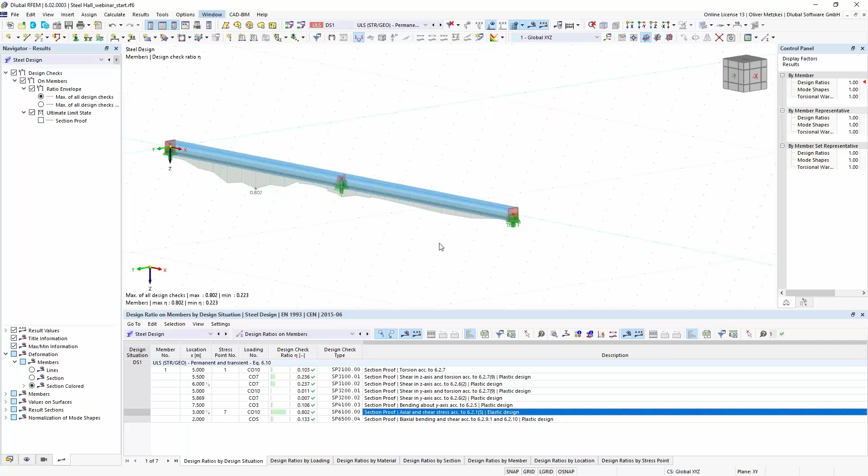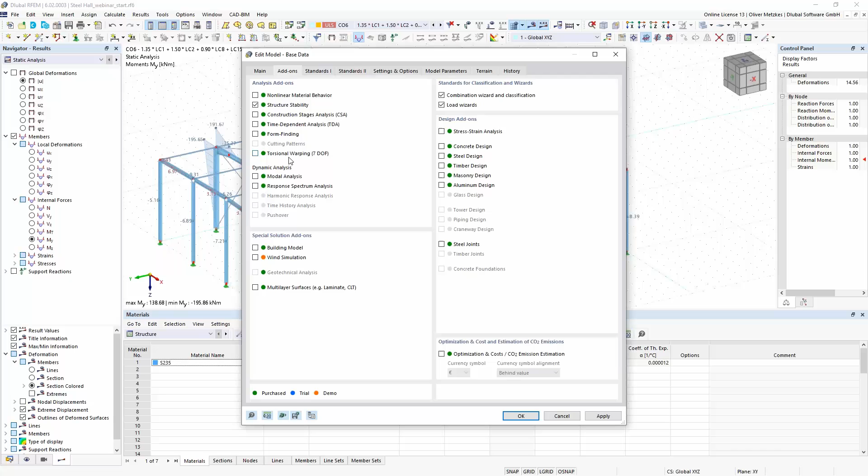Now we also want to check the lateral torsional buckling on this global model. For the beam girders, we would now also expect to get these lateral torsional buckling shapes. So first we need to activate the structure stability add-on. We have it already, and also the torsional warping add-on.

Now I just want to give you some additional hints, because if we look at this model, as we have said, all the members are by default independently for the warping, so all the members are free at their edges for warping. Now we still want to see these beams as a continuous one, so that the warping can be continuous in the whole beam. Therefore, we would need to create member sets.

That is the option if you have members which are not connected. So if you don't have internal nodes, but real nodes, you can still consider them for a continuous warping if you create member sets. So I will create the member sets.

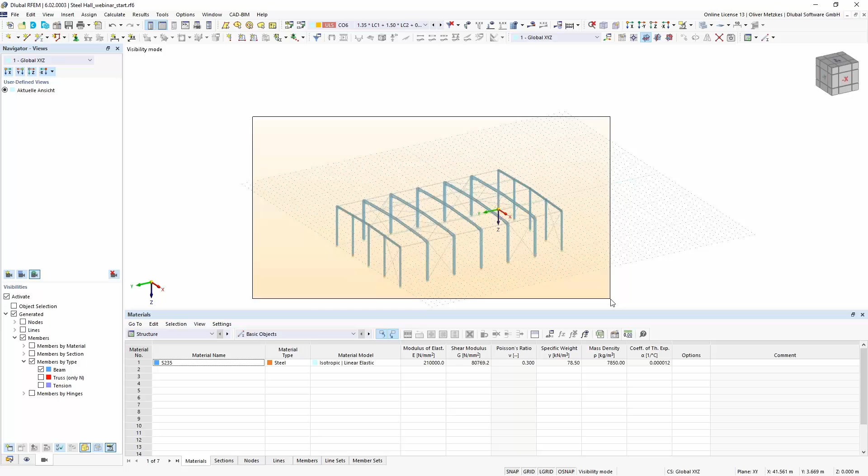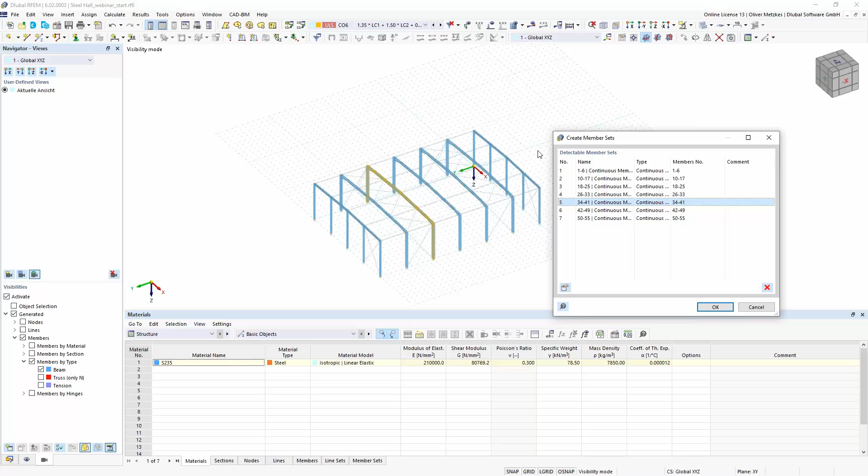For that, I will activate my visibilities for the members to only get the beam ones. So then I can select all the frames easily, and I don't want to have these additional columns here. Okay, so this one. I just right-click on the members, and here I can create the member sets. It automatically recognizes that I have independent systems here, and it tries to create the continuous member sets. So you see, I can now easily create the member set for all the frames.

So that is possible now, to consider those members also continuous in the warping, because that is the property of the member set object. If you don't want to have it continuous in the warping torsion analysis, then you could also activate this discontinuous torsional warping. But normally when you create a member set, it is meant to have it as one structural object, so you will have continuous warping for all the members which are connected in one member set. Okay, so that is the first important thing, that we can consider this beam as a continuous one.

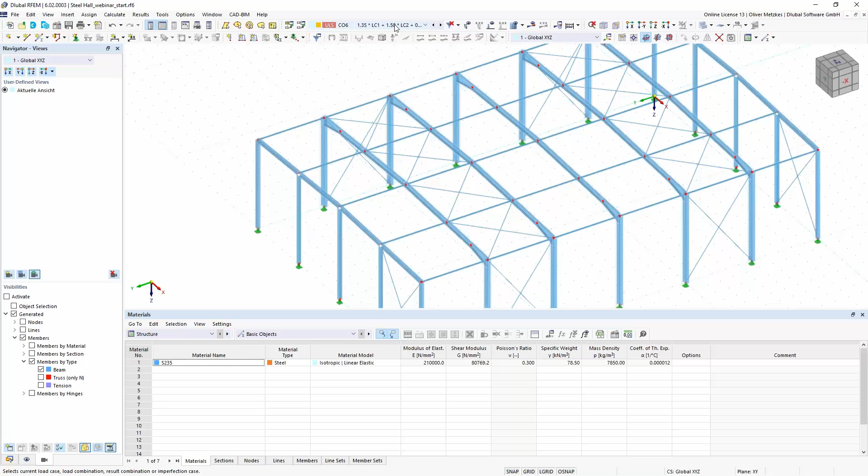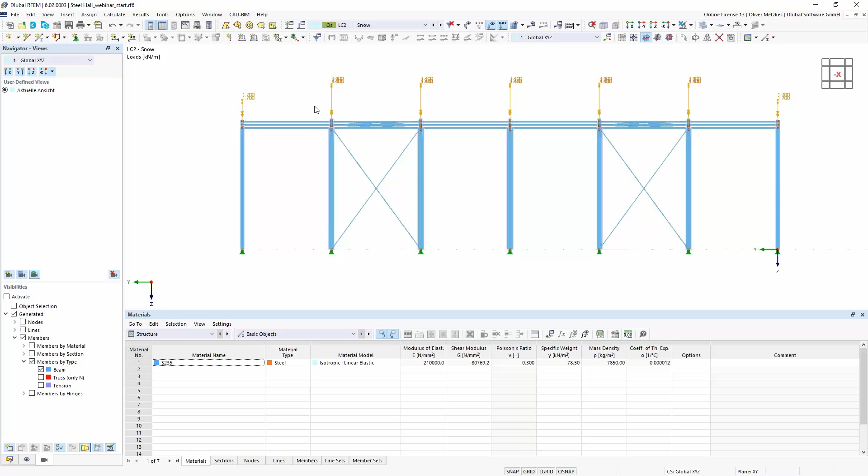And then we already also know that the load application point needs to be defined by the force eccentricity. So in this example, I just want to change the force eccentricity for this member load, so I want to also apply it at the top flange. For the 6 degrees of freedom calculation, it was not necessary, but now if I want to consider it in the warping torsion analysis, I also want to consider this eccentricity in the stability analysis.

So I just added my member loads and set this eccentricity value here. In this case, I can use this simple reference point because I just want to apply it at the top flange of the cross section for all these members. So I can use this simple reference point.

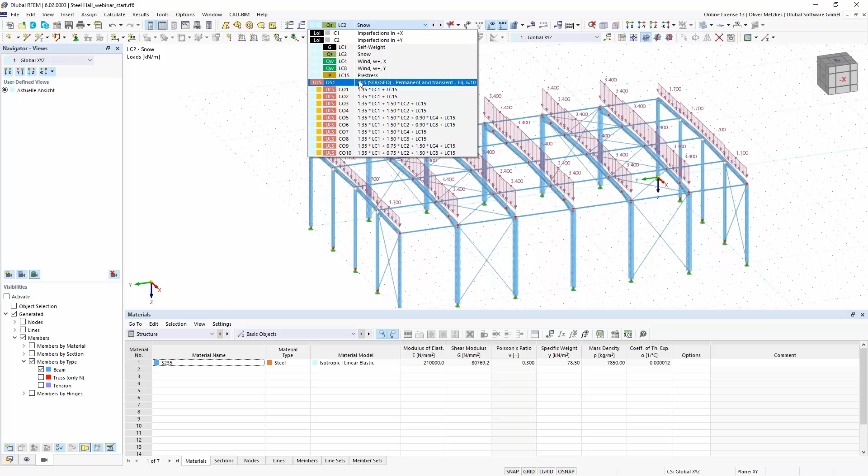Okay, so now I have changed those two settings, and I want to run the stability analysis. I think we still have it activated from the example before. So if I calculate design situation number 1, I have my 10 load combinations, static analysis, and then stability analysis. And now I would expect to also get this lateral torsional buckling shapes.

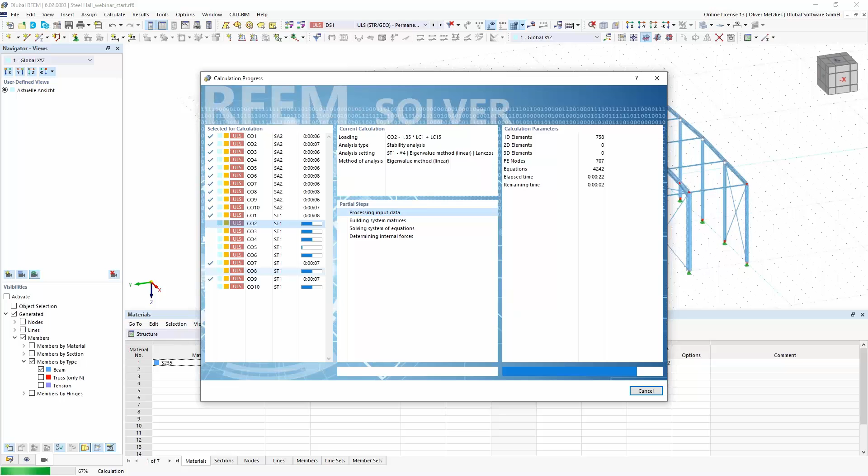Before, it was only the in-plane flexural buckling, you probably remember. Now I want to look at the most governing mode shape, which would be lateral torsional buckling. If we look at design situation number 1, the minimum critical load factor now is not 1.1, but now it's 1.4. So if we look in load combination number 6, in the results for the stability analysis, then we see that now the first mode shape is also correctly found as this lateral torsional buckling shape.

And automatically, as we are working now in a 3D model, also the stiffness of all adjoining elements is considered. So already the bracings and all the couplings between the members, that is correctly considered. And so we get this critical load factor. So we can also do detailed stability analysis on a 3D model.

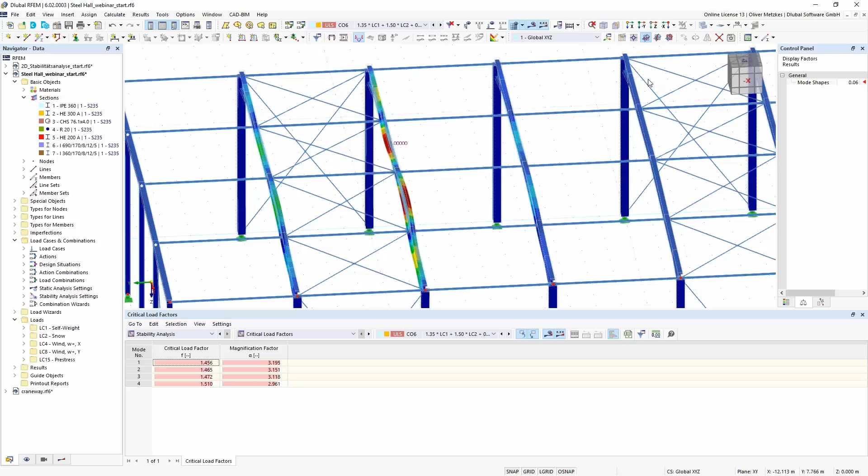For example, to consider also the coupling between beams that are not equally loaded, to also consider the stabilizing effect. You can also see that the structure is considered. For example, if in this example I changed the section of the bracing from a round section with 20 millimeters of diameter to one with only 10 millimeters. So in this example, I will just rerun the stability analysis now with bracing that has a lower stiffness, just so that you can see what we will get as a result.

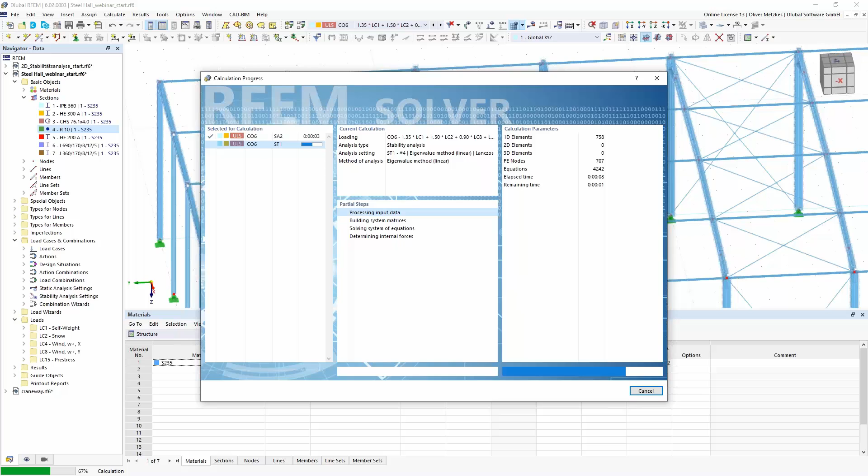So in load combination number 6, before it was this lateral torsional buckling between the fixation of the bracing. But now we have a lower stiffness, and it's not stiff enough to prevent this flexural buckling of all the frames. So now we have a lateral torsional buckling mode shape with critical load factor 1.1. So the first one is now the most critical one with this lateral torsional buckling mode shape, not between the bracing fixation, because the stiffness is too low now. So we will have this global lateral torsional buckling here.

So you can see that this stiffness is directly considered for all the adjoining elements, and there's no need to calculate a certain equivalent spring stiffness, for example, in this 3D analysis. So you can use this combination, Structure Stability add-on and torsional warping add-on, to also perform detailed stability analysis on 3D models with member elements.

Okay, so I think those were the examples that I wanted to present to you on the two add-on modules. Now I can give back to Andreas.

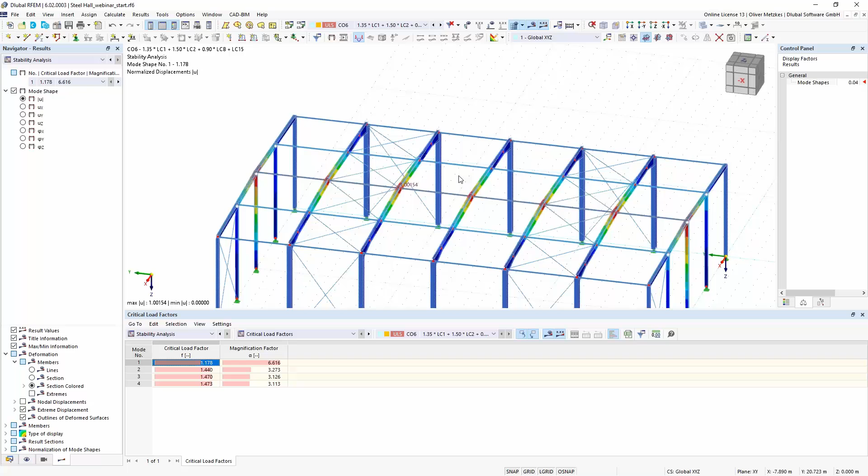Thank you, Oliver, for this nice presentation. I would like to show the attendees the website with the knowledge base article about the torsional warping.